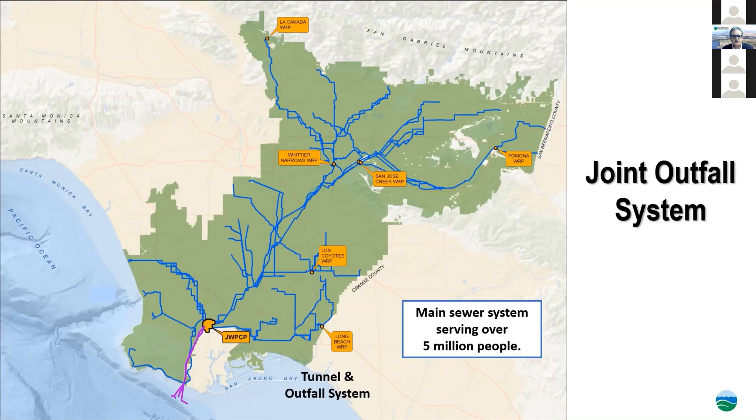And subsequent to that, we extended our system. The concept since the early 60s is to utilize water reclamation plants upstream that treat predominantly residential flow and recycle as much of the water as we can. And then our big plant, the Joint Water Pollution Control Plant, would treat wastewaters high in salts and minerals and discharge it to the ocean.

And a little bit about that plant. Here's an aerial view of the Joint Water Pollution Control Plant. It treats an average flow of about 260 million gallons per day. That's enough for a population of about 3 million people just in and of itself.

You can see that it's connected after treatment to the ocean by 2 tunnels. We're actually in the process of building a third. We connect out to outfalls and discharge 2 miles off the coast into the ocean at a depth of 200 feet. Our mantra at the districts is we convert waste into resources.

So we recognize that there's no more precious resource than water. We have for many years been looking and working towards a method of recycling this water that's currently going to the ocean. We do a lot of other recycling. We have food waste recycling programs. We generate renewable energy at this site, but up until now, we have been discharging out into the ocean. And so we have this water available.

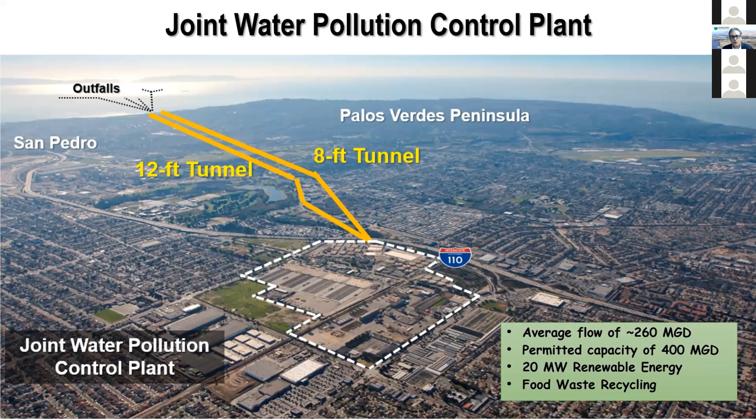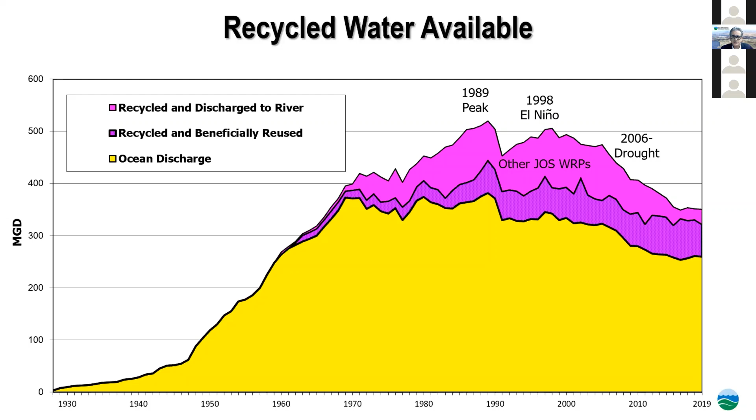I do want to mention too, you can see that since the 90s, and really since the 2005-2006 period, we have seen a significant drop in the water coming to us. That is because the word and mission of water conservation inside houses and businesses is getting out there, and we have seen about a 25% drop in our flow. So that is a real positive that LA County is doing a great job conserving water use, especially inside homes and businesses. But we do know the next drought is just around the corner.

So the question really is, the need for a new water supply that can be steady and reliable is there. You'll hear from Deven, our main partner with the Metropolitan Water District, about the technology that's going to be used.

So the technology has really improved to the point where it can handle and treat this water and create ultra pure water. And finally, you'll hear from all of our partners that we need to treat, convey, and distribute this water.

So that's key. Here, once again, is the aerial. We have a demonstration plant up and running, and my predecessors had the foresight to acquire some property adjacent to the Joint Water Pollution Control Plant about over 20 years ago, knowing that at some point in the future we might need advanced water treatment. So that kind of, I hope, sets the stage for you as we move on through today's webinar.

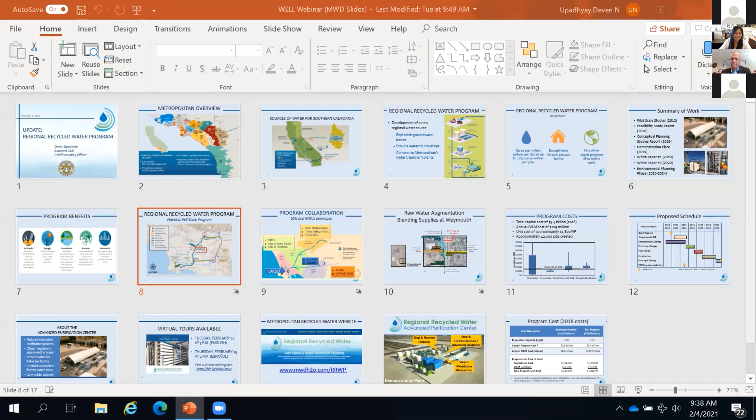Thank you, Martha. And thanks again to Victor for bringing this together, and thank you to the WELL organization for making this happen today. This is a great opportunity to share with you about this major program that we're working to pull off. I think that the key message here is to make this happen, you need partnership with many different agencies, some of which are on the agenda today. You'll also see that we're actually working to partner with a broad group of other entities that aren't here today to try to make this happen. Very ambitious, and we look forward to sharing this information with you and working with you in partnership to get it done.

To start, Metropolitan Water District, who are we? If you look at this graphic, this shows you our member agencies and our service area here in Southern California. 26 member agencies participate through Metropolitan Water District, and we bring imported water supplies to those agencies that you see on this graphic across 6 different counties.

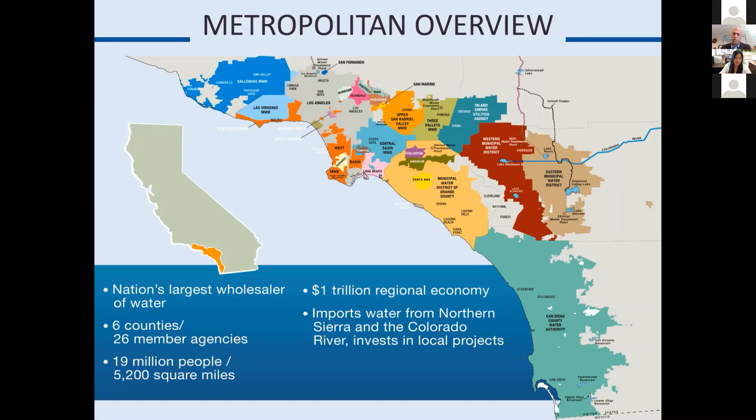We also sponsor major programs to help develop additional local supplies in this region and to promote conservation and reduce water use, to become more efficient with the water that we do use. Our service area has about 19 million people in it, and to give you a sense, we provide roughly half of the water that's used in this urban Southern California environment. We're the largest treated water provider in the United States of America.

And this graphic gives you a sense of the way our region receives its water supply. So here in Southern California, roughly 45%, sometimes 50%, depending on the year, of the water that is used by businesses and residents in Southern California comes from local sources that are here within the region. Conservation is part of that. Recycled water, like we're talking about today, the biggest chunk is actually groundwater supplies. The other portion of water, the other 50 to 55%, is coming from imported sources through the Metropolitan Water District.

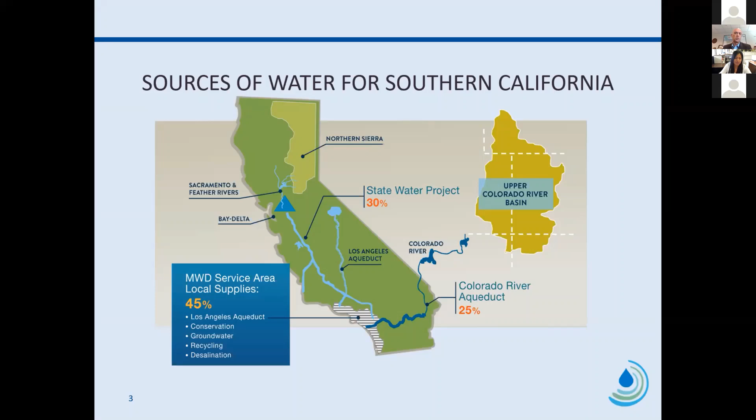You see on this graphic in the north part of California, water that moves through the State Water Project. We're the largest contractor for supply on the State Water Project. That's managed by the Department of Water Resources in the state of California. And we also have our own aqueduct system, the Colorado River Aqueduct System, that comes from the east, shown here. So these are your major supply sources that are providing for the water that's used here in Southern California.

What we're discussing today is a tremendous opportunity to increase the amount of water that is coming from recycled water supplies that's sourced here locally within the region. This opportunity would look at 3 uses for this recycled water. The primary use, the largest use, would be to replenish groundwater basins, help stabilize those basins, get this water into the basin, and then it can be pumped later for use to meet the needs of the residents and the businesses that overlie these groundwater basins.

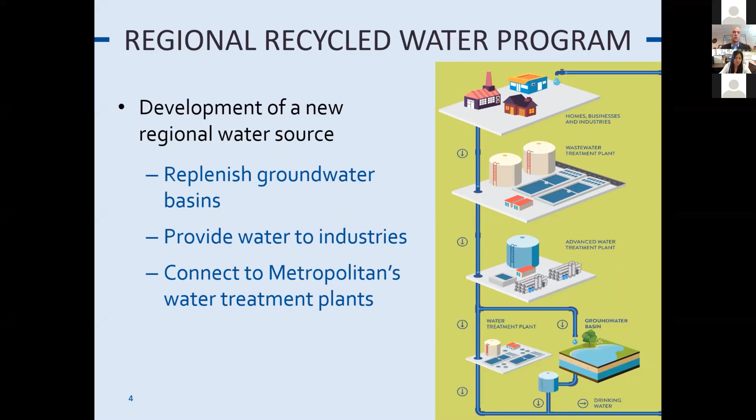The second use is for a smaller portion to be used for industrial use. This is an industry that is potentially served by this project very near the location that Robert just shared with you in those previous graphics. And the final piece, the last phase of the program, would connect directly to our major treatment facilities. That advanced purified water would then move into those treatment facilities and move out through our distribution system, making it to most consumers in Southern California, which is a great opportunity in the long term.

To give you a sense of the magnitude, we're talking about a facility that would be one of the largest facilities in the US. It's 150 million gallons a day. That's about enough water for 500,000 homes to use in a year, or if you're looking at the number of people per household, roughly 1.5 million people.

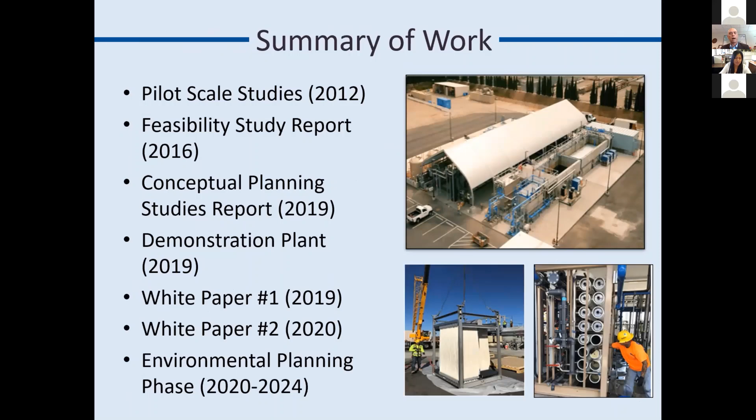Timing wise, we've been working on this with our partners for about 10 years already. This gives you a sense of all the steps we've taken in this partnership to prove out that we can get this project done. There's a lot of work still to do, but the concept has been proven out. The boards of the LA County Sanitation District and Metropolitan Water District recently approved starting the environmental process, which will take about 3 years, and that's the stage we're in now.

We've already touched on the drought benefits and the ability to replenish our groundwater basins. This program will also have a significant economic boost, both because it increases reliability of supply - disruptions in supply have an economic impact - but the very construction of this program will create approximately 40,000 jobs across the construction period of about 10 years. So significant economic activity will be generated, and it puts wastewater that currently goes out through an outflow to very good use, being reused for water supply purposes.

So this is what the program looks like physically. The light blue lines in the background across Southern California are our treated water distribution lines that already exist. The darker blue system is what we refer to as the backbone system for this project. In the lower left-hand corner, it starts at the facility Robert described, the Joint Water Pollution Control Plant, where we'd take the wastewater, treat it through advanced purification processes, and move it through the backbone system east and north to a number of potential locations for groundwater replenishment.

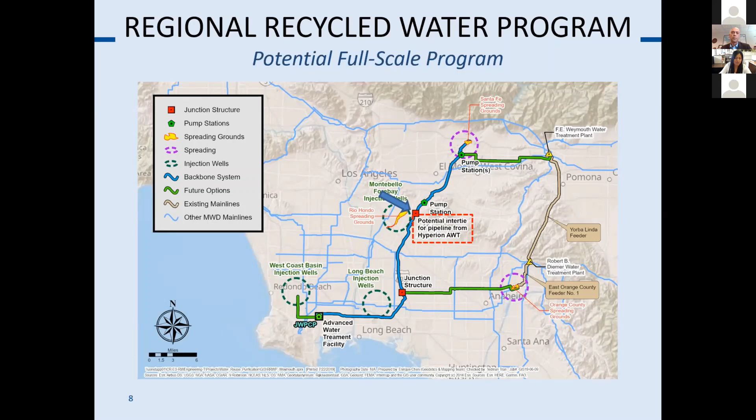To give you a sense of how that would work, here's another animation showing a potential intertie with the City of Los Angeles's Hyperion plant, where they build a very similar treatment system that would provide additional supply for groundwater benefits. There's an intertie we're contemplating where these 2 systems would interconnect.

To give you a sense of how this works with our partnerships, we have many partners we're working with, both helping to make the project physically happen through construction, helping with management of the water supply, and even off-takers who would take the raw molecules of the water and help us deliver it. Everyone from the Water Replenishment District to the cities of Long Beach and Torrance - we've already signed letters of intent with these agencies. You see in blue, LA County Flood Control District, and we'll hear from them a little bit later with Mark Pestrella.

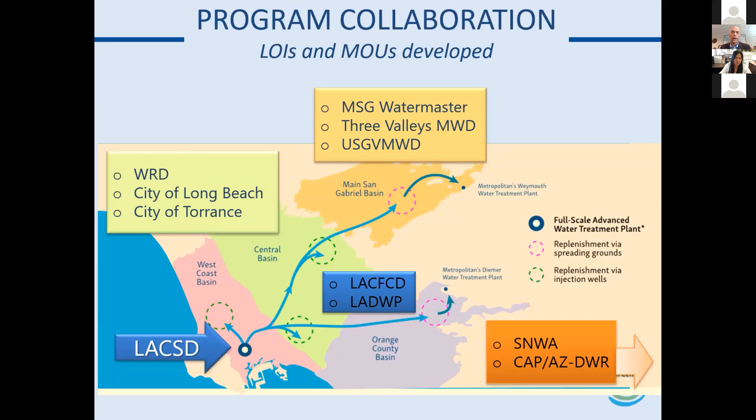LA Department of Water and Power, I mentioned the potential intertie with their program with Hyperion. Main San Gabriel Water Master and our member agencies, 3 Valleys and Upper San Gabriel Valley Municipal Water District, we'll hear from them a bit later on the agenda. And our partner, LA County Sanitation District, helping us at the core to make this project happen. In the lower right corner you'll see acronyms: SNWA is Southern Nevada Water Authority, and Central Arizona Project. These are partners on the Colorado River interested in helping fund this project in return for an exchange of water on the Colorado River with our river supplies. So major partnerships here to make an ambitious program like this happen.

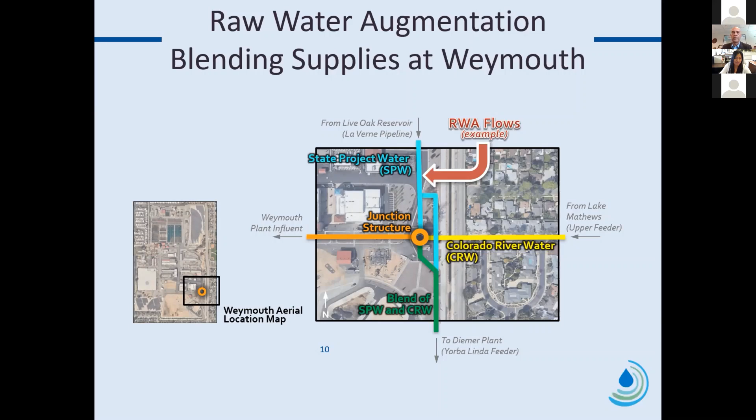This graphic shows an aerial view of one of our treatment plants, the Weymouth treatment plant in the city of La Verne. I hope some of you may have already toured that facility. What this shows on the right is that in blue we receive state water project supplies there, and in yellow we also receive Colorado River supplies, so we receive a blend of supplies that move through this treatment plant. The concept is that ultimately we would also receive the red supplies from this advanced purification facility, blending 3 different supplies together moving through that treatment plant. The green line going south shows that water could also move to one of our other treatment plants. So a true integrated system that we would be able to accomplish with this concept.

In terms of cost, this graphic shows the black line is roughly $1,800 per acre foot of water. It's roughly in line with the other major local supply sources that can be developed here within the region. In fact, it's lower cost than some. There's always a range for those sources based on the specific project being developed, but this project is in line with those costs.

The total cost estimate for both phases of the program is roughly $3.4 billion, and those were estimates in 2018. As part of the environmental process we're undertaking over the next 3 years, we'll be updating all of those cost estimates as we hone in on the specific alignments and treatment trains that would be used to make this project happen. You can also see the job creation associated with this kind of work.

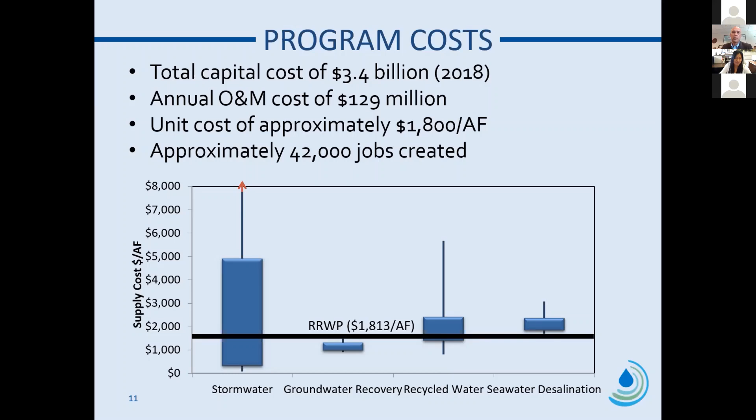This is the schedule we face. The yellow dot at the very top shows the board approval of our 2 agencies starting the environmental work. In beige below that is the timeline for developing this environmental impact report, extending all the way to 2024. We have a demonstration plant already running right now, proving out the treatment processes. You can see the design work, construction, and ultimately bringing this facility online in the early 2030s. That's the time frame we're looking at.

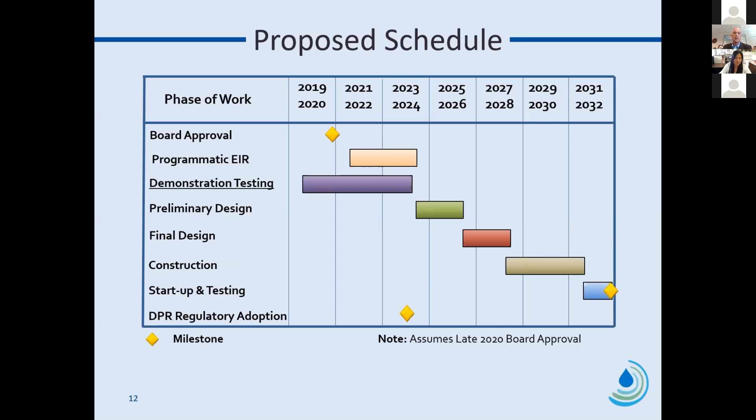I wanted to share with you quickly, this is our Advanced Purification Center. It's been built at the Joint Water Pollution Control Plant, a large demonstration facility. Our vision is that it's used to help work with the regulatory community in the state of California to get approval for the full-scale project, but it's also an education center.

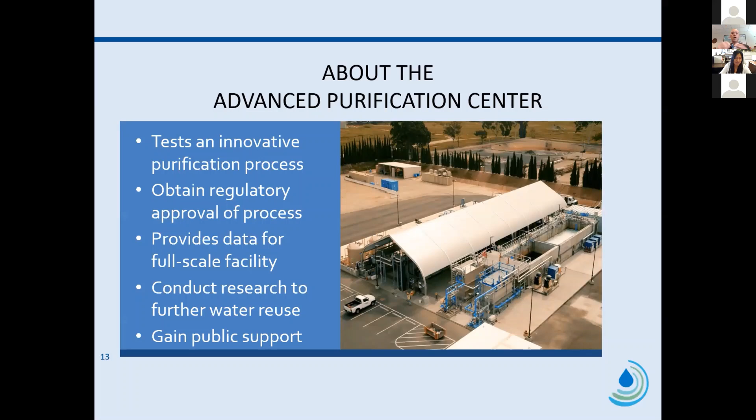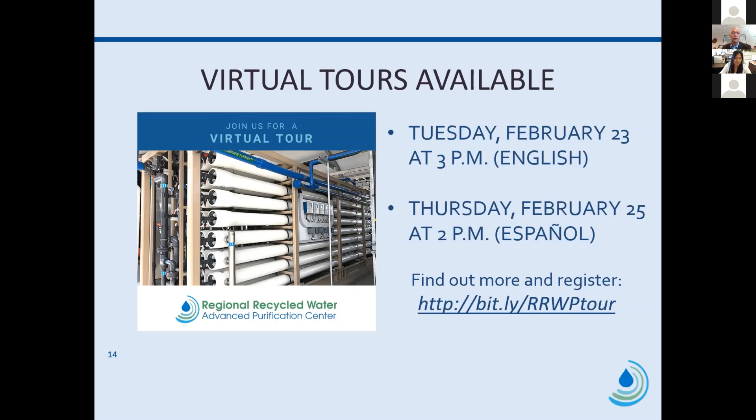During COVID-19 we haven't been able to have physical on-site tours, but we've converted everything to online tours and we'd love to host you at those tour events. We have a couple coming up the upcoming Tuesday, later in February on the 23rd, an English tour that we're hosting, and on Thursday, February 25th, a Spanish tour. You can see the link here, and hopefully that's an opportunity for you to register to participate in the virtual tours. I certainly look forward to a day where we can actually host physical tours again, to get you out there and work with you to understand the processes, answer questions. It's a great opportunity to see the way this facility would work.

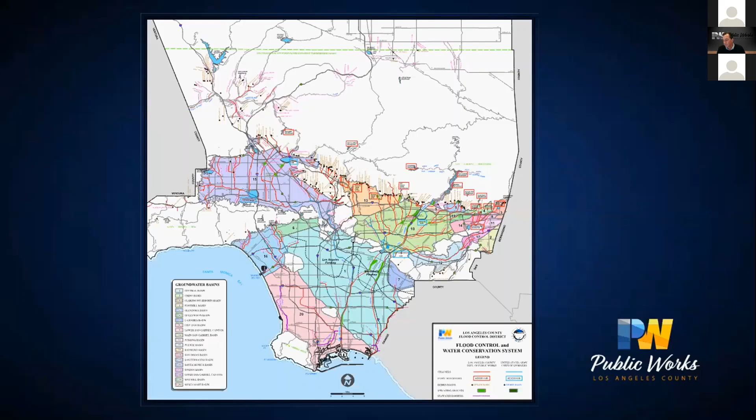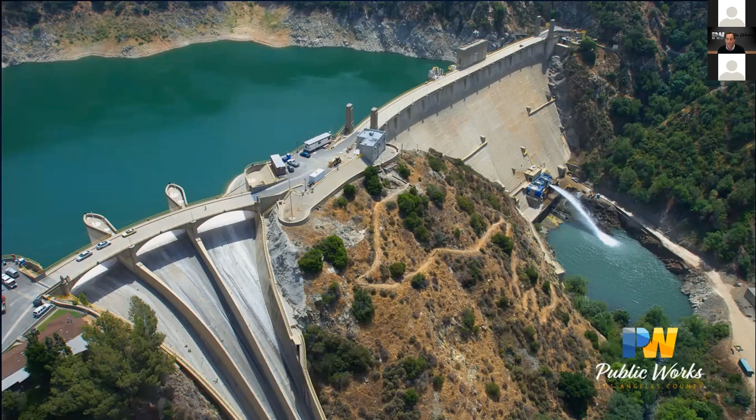There are 14 major dams, and 620 miles of open channel in which we convey flood flows and also convey water to facilities like spreading grounds. If you go to slide 4, you'll see a picture of the Pacoima spreading grounds in Los Angeles County, in the Sun Valley area. We put this picture up to give you an example of how we can move water through the system.

Back in the day, major investments were made by the Flood Control District in obtaining these open lands throughout LA County. In fact, we have 27 such spreading facilities in Los Angeles County. The purpose of these facilities is to divert stormwater from the mountains, from the drainage when it rains, into these spreading facilities. We fill them up, as you can see here, this one's full of water. Over a period of time, 3 to 7 days, the water in these basins percolates into the ground.

There was a graphic earlier showing water going into the groundwater basins in Los Angeles County. This replenishes the water stored underground, which is later used for drinking water supply, and it's pulled up by a number of agencies that have water rights throughout the basin. Another great use of these spreading grounds is that we can also move imported water into the system and put that water in the ground for later use.

We have been increasing the amount of recycled water that we put into the system. Currently, we move about 10% of the county's water that is replenished through the system from recycled water sources. It's a great way of storing water below ground, but also a great way of cleansing the water from pollutants. One of the best ways to clean water and make it ready for use is to run it through the sediment underground in Los Angeles County, which has been built up over the millennium to become a really great filter.

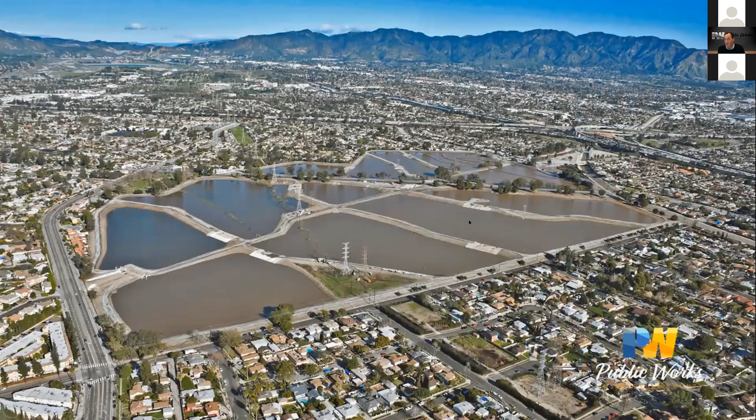Let's go to the next slide. Why is LA County involved? You see we've got these assets, but how are we involved? Interesting enough, from a monetary standpoint, not one drop of the water I'm showing you in these pictures is actually owned by LA County, the Flood Control District, or Public Works. It's all prescriptive water to the water retailers in the area who have water rights through LA County, and it's governed by over 200 water retailers and water replenishment agencies.

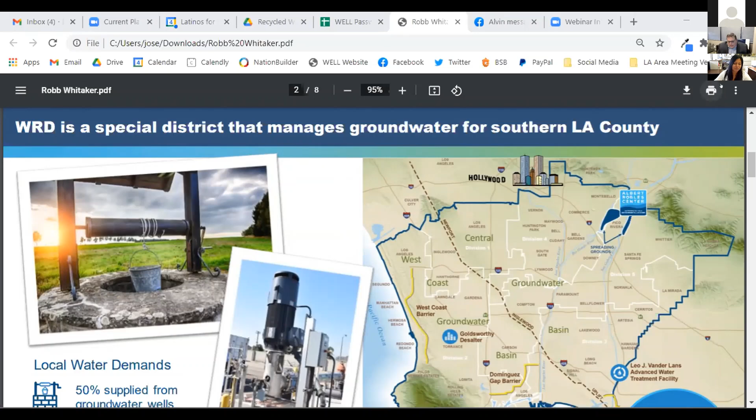Again, in our region, we've got 43 cities, 4 million people. Groundwater makes up half of the water supply. I was starting to say that WRD exists because the amount of water allowed to be produced in southern LA County, in both the Central and West Coast groundwater basins, is provided under an adjudication that set pumping rights in our basin. Those pumping rights were set at more than double what Mother Nature can sustain. So WRD was created to replenish, supplement the natural replenishment, and allow for those pumping rights to continue in the future. In 2004, WRD created what we call our Water Independence Now, or WIN program. What we wanted to do is leverage what we had done in the past in terms of working with others and building projects on our own to utilize more local water resources.

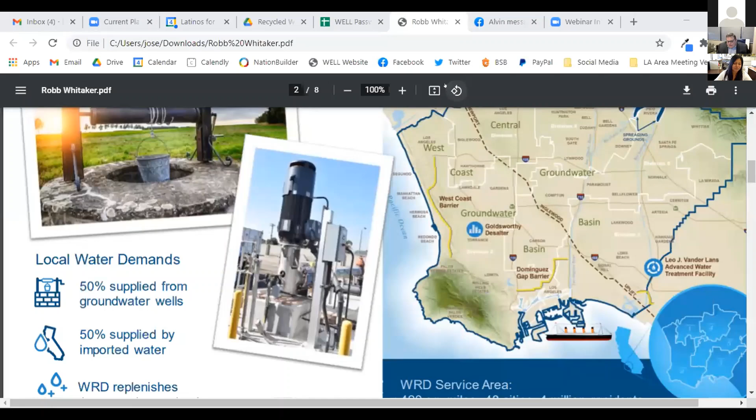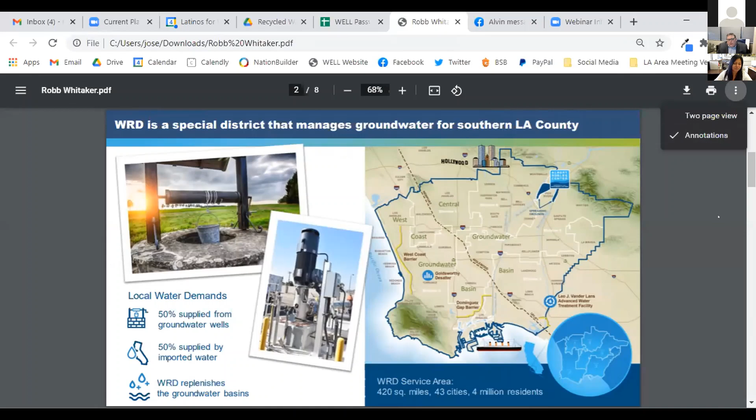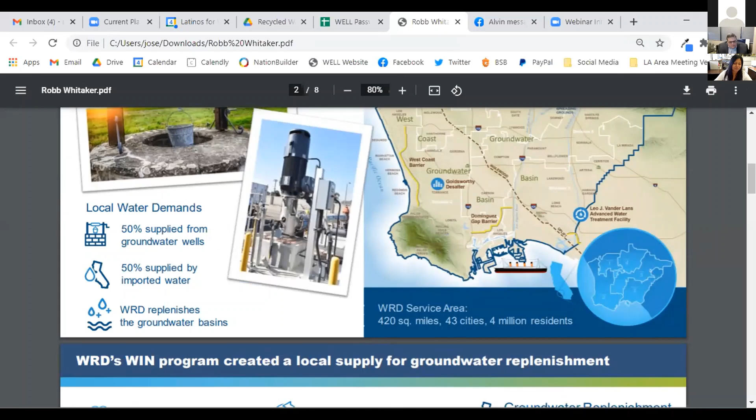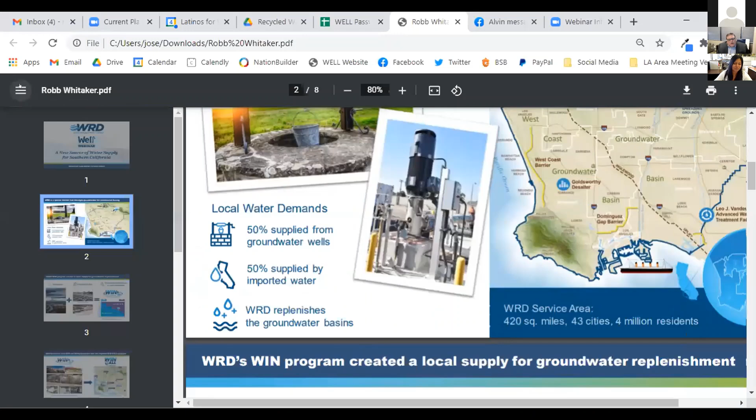WIN identified the final efforts that would be needed to get us to the point where we could be completely locally sustainable in terms of replenishing our groundwater supplies. And I'm happy to say that in 2018, we finished the final component of that, which is our ARC project in Pico Rivera. Now the groundwater supply in our region is completely locally sustainable through stormwater and recycled water.

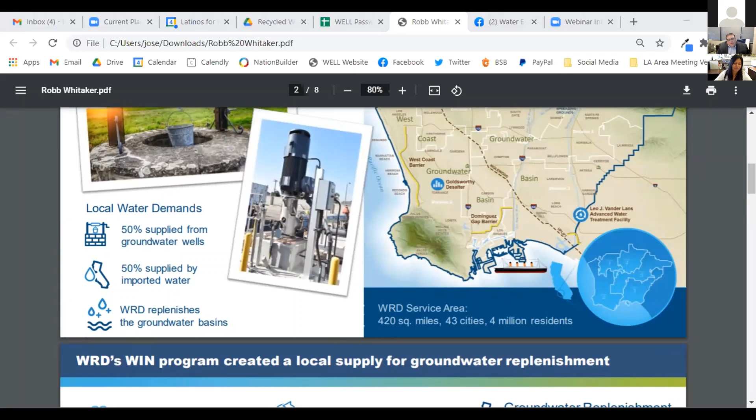What we wanted to do is take those efforts and look at what we could do regionally to help leverage our WIN successes. We looked at the possibility of partnerships with county sanitation districts, MWD, the County Public Works, and even City of LA with our Hyperion plant, to look at ways that we could utilize the groundwater resources even more.

Fairly recently, in about 2013, 2014, the pumpers and WRD were able to work together. It took us about 15 years to put this together, but we were able to amend these groundwater adjudications that allowed for the pumping rights to tap into the empty space in the basin. That's a big deal because we have almost 500,000 acre-feet of empty space in the basin that can be used to take these local resources, put that into the ground, use that empty space as a reservoir, and as Mark and Devin and Robert have talked about, pump that water back out of the ground, and it could be a drinking water source of supply.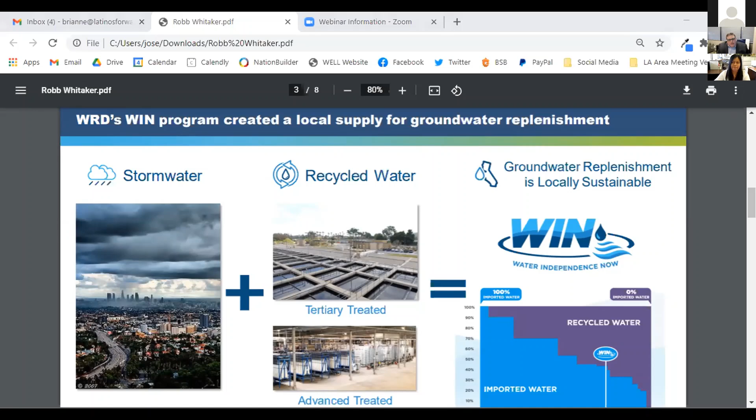So the project we're talking about today is a very big part of that. It would provide local resources that would help us utilize that space in the basin to create more local resources and increase our local sustainability.

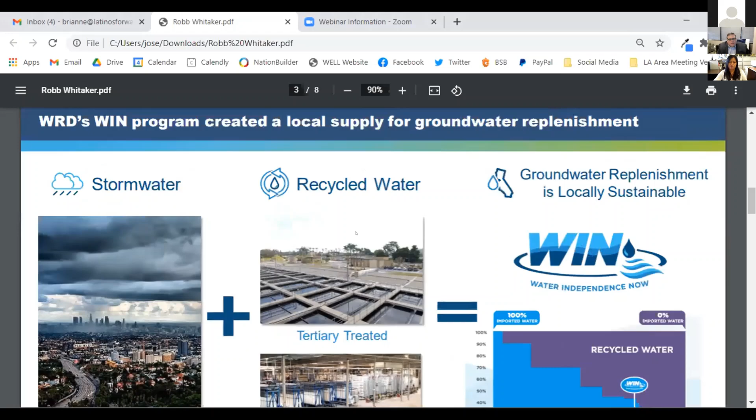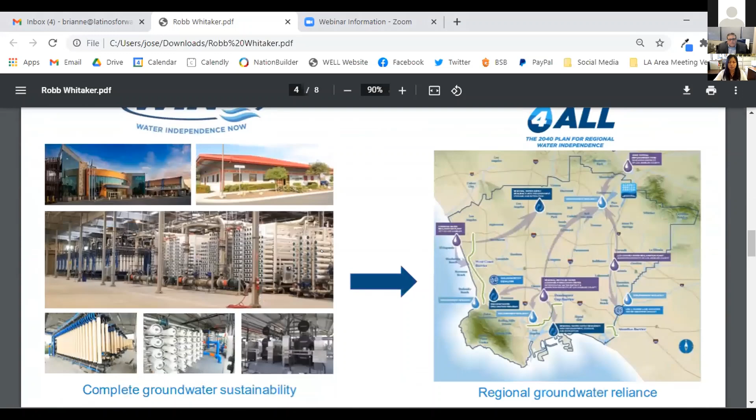I'm sorry, Rob, I hate to interrupt you, but I think we're having technical difficulties here. What slide are you in? Are you okay here? Brianne, can you try to click on the PDF and make it bigger? It's on the top left side, maybe the little box. There's a couple of little boxes. Maybe, yeah, click on that. Click on each frame and then see if you can page down. I'm sorry. Okay, Rob, let's see which one were you in? I am on this one. The ones on the screen? Okay. Yeah, and if you can go, it's to the top left. See if we can... oh, I don't know why can't we. It's just a PDF. Okay. Okay, sorry about that, everyone. Just technical difficulties here. Yeah, the slides I received are PDF. I don't see a full screen button, so I don't know what you all can see, but this is what I've received on my end.

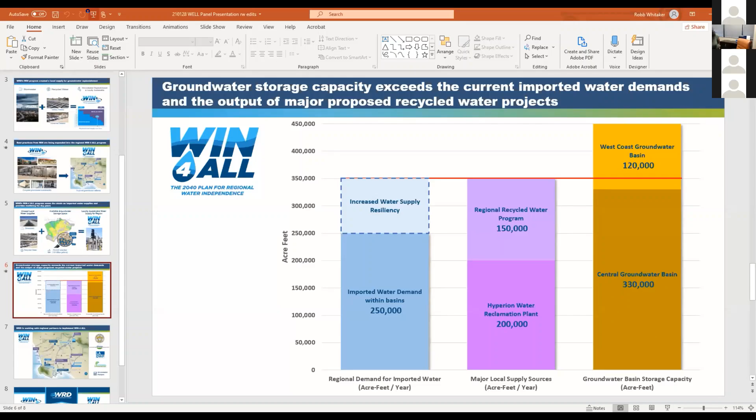We can't share screen while you're sharing screen, Brianne. If you can stop sharing, I'll try to share ours. Okay, Rob, sorry about that. That's okay, I am happy to be the problem child for the day. Can you see it now? Yes, it's perfect. Okay, thanks.

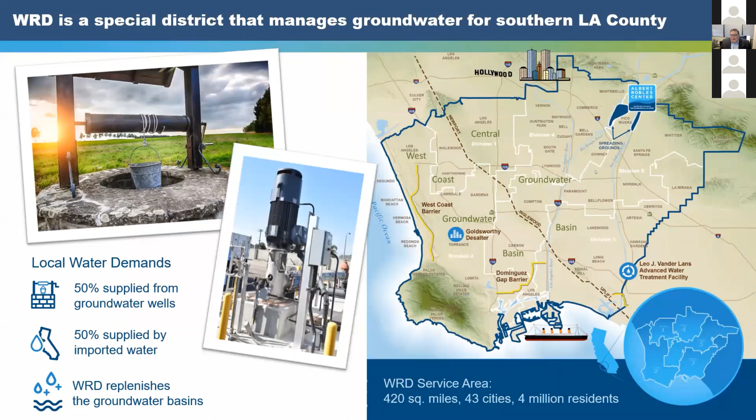So basically, the bottom line is with our WIN program being successful for us in terms of groundwater replenishment, we've leveraged that into what we're calling our WIN 4 ALL program. We're looking at using even more local resources through the project we're talking about today and others to utilize that empty space in the basin and create even more local water resources that are completely locally sustainable.

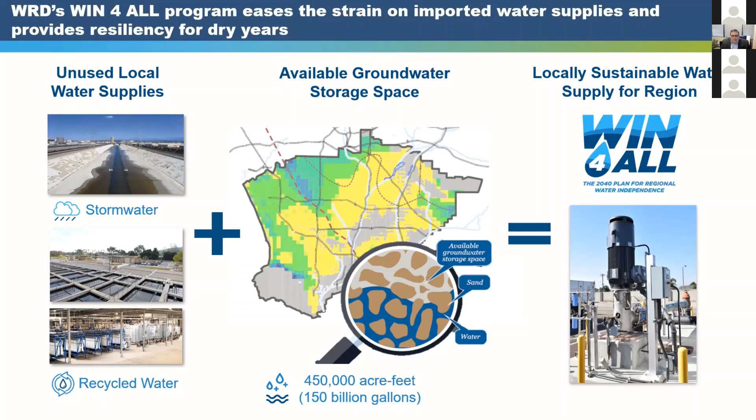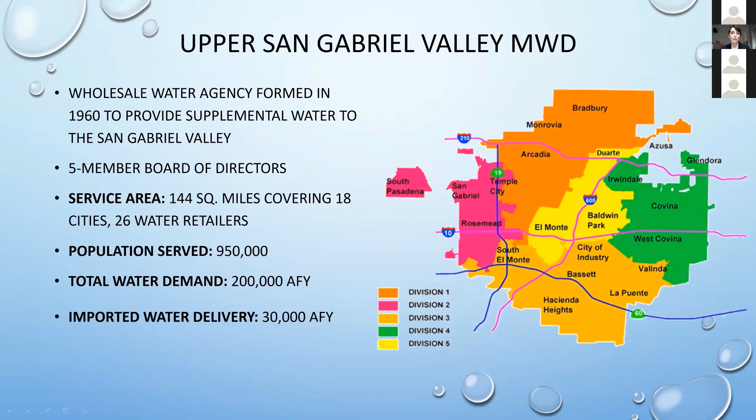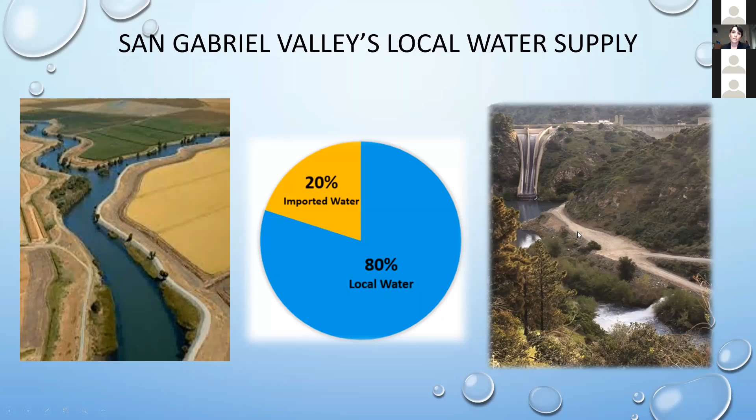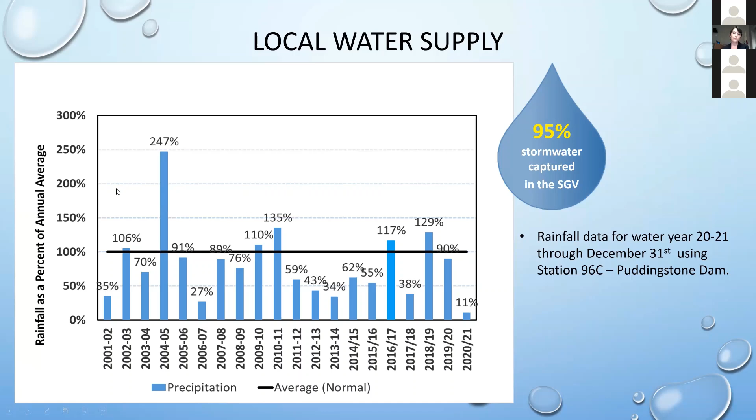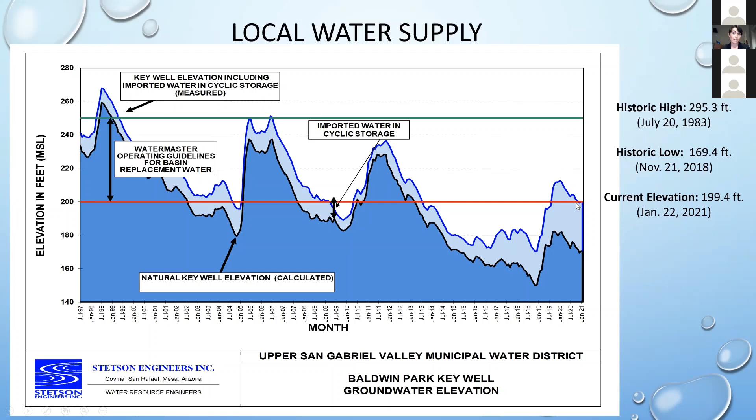This graph here is showing our basin level, our underground water measurements. This goes back to 1997. Again, you can see the trend going downwards as we have less rainfall. This red line here is the minimum level we would want for a healthy basin. Once you go below 200 feet in elevation, you're looking at wells that could dry up, sand in the wells, so we want to keep it above this red line. The dark blue area under this graph is our local rainfall, this is called the natural key well elevation, and the light blue is the imported water. So another thing you can see is we are becoming more dependent to keep that level at a healthy basin level in recent years.

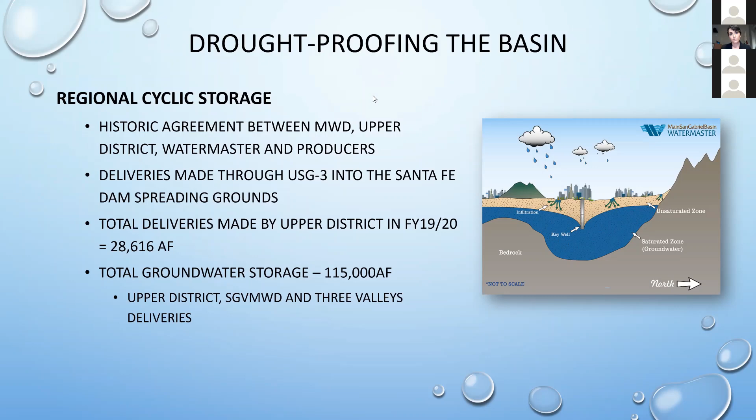Other ways that we drought-proof our basin, we have recycled water projects, local recycled water projects. This is non-potable water. We use this for watering lawns. At Rose Hills, we have one, and we have about 24 miles of pipeline there. So this really helps to keep us above.

Also, we have a really great and award-winning water conservation effort. We were 2020 Partners of the Year with WaterSense because we've done such a good job at working on water conservation. An example of that would be our plant voucher program. We offer residents $250 to purchase certain plants that are beautiful and also drought tolerant, which in turn uses less water in our area.

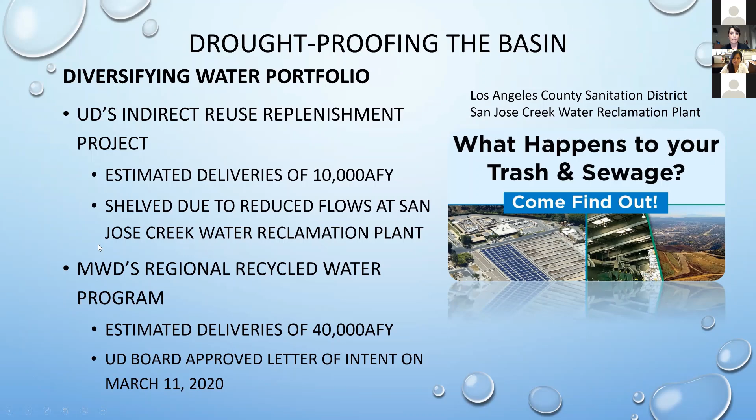And just in conclusion, regarding the water quality: we've heard in the news a lot of talk about PFAS and other chemicals of concern. As mentioned, there are several different processes that will be used at this plant, and the pilot plant actually has these that show really good promising results in removing these toxins from the water to produce a clean water product. With that, if there are any questions, please feel free to reach out and visit our website.